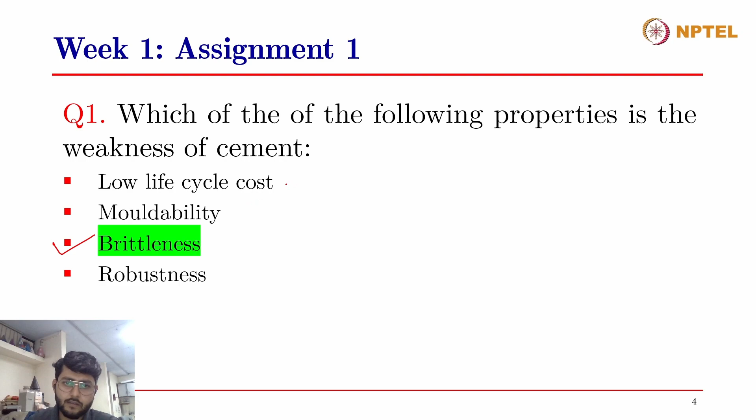All right, the correct answer to this question is brittleness. So brittleness is the weakness of cement. It is not the low life cycle cost. In fact, cement or concrete is a low cost material, as we know. It is moldable—cement or concrete in its fresh state can be molded into any shape or formwork when poured. So in fresh state, in a plastic state, cement or concrete can be molded. It has good moldability, and it has a low life cycle cost as well.

And then what is robustness? Robustness of any material is its ability to resist a great change or deviation in its desirable properties or performance parameters when the input parameters or surrounding conditions are changed a little. So a robust material won't undergo a large deviation in performance when input or exposure parameters are changed within a certain range. So concrete is a robust material.

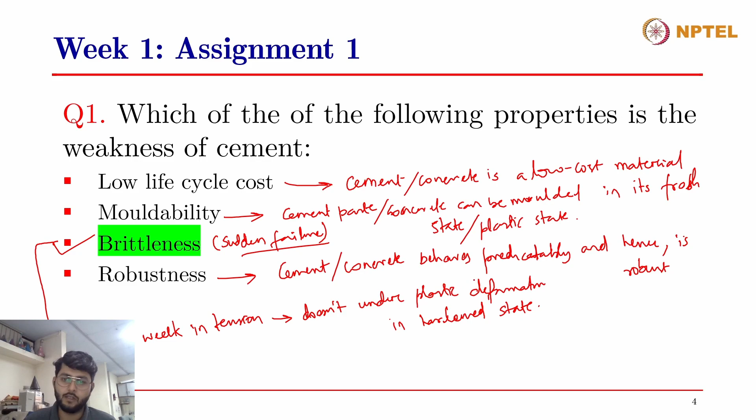But of course, cement or concrete can undergo plastic deformation in its fresh state. It can flow like a flowy material. But when we consider the hardened state, it doesn't undergo large deformation and breaks in a brittle manner.

Moving on to the second question: how much carbon dioxide is produced during the production of 1 ton of ordinary Portland cement? Options: 0.25 tons, 0.5 tons, 0.75 tons, or 1 ton. Which of these options is correct? Can somebody answer this question?

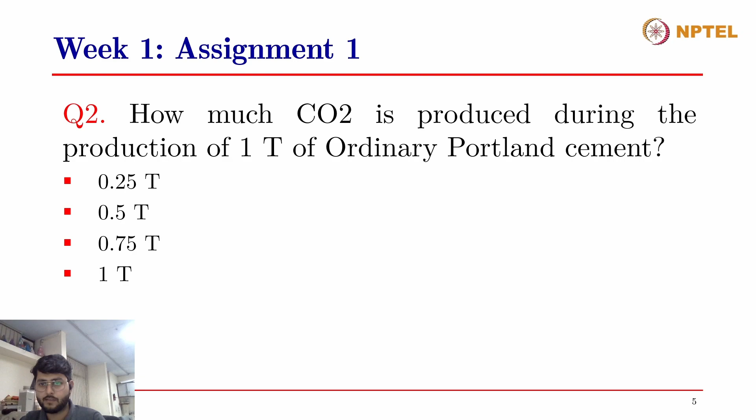The correct answer to this question is 1 ton. So 1 ton of carbon dioxide is produced during the production of 1 ton of ordinary Portland cement. It is a straightforward question. We have also discussed this in the previous sessions.

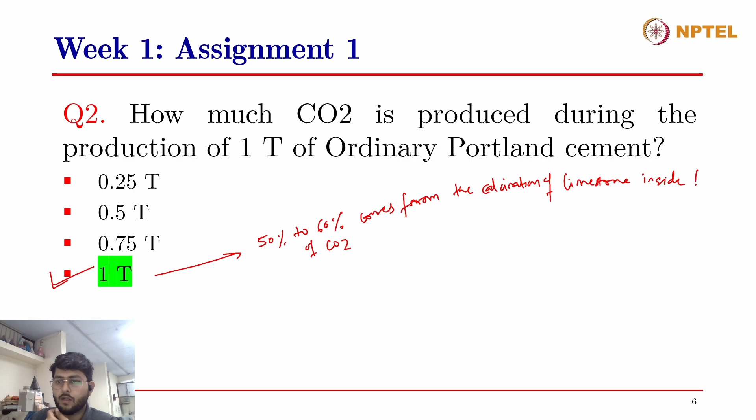Around 50 to 60% of this carbon dioxide comes from the clinkerization reaction or the calcination of limestone. When limestone gets converted to lime and carbon dioxide, that carbon dioxide released constitutes 50 to 60% of the total carbon dioxide emission associated with cement production. The rest is due to indirect emissions, which could be due to burning of fuel, transportation, grinding using ball mills, use of electricity in all the processes associated with production, and so on. That is the breakup of the total carbon dioxide emission associated with 1 ton of ordinary Portland cement.

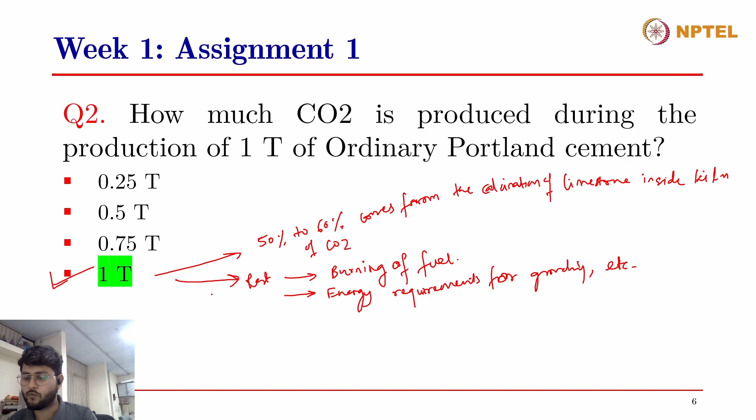Moving on to the third question: what is the formula of ettringite? Four options have been given: C3AH6, C6AS̄3H6, C6AS̄3H32, C4AS̄H12. Which of these four options is correct? What is the formula of ettringite? It's a very straightforward question. Can somebody answer this question?

The correct answer to this question is C6AS̄3H32. It is important to remember that ettringite is also called the AFt phase, and AFt is the abbreviation for aluminate, ferrite, tri. So the T in AFt means tri. In this case, it is trisulfoaluminate. So this tri can be associated with the sulfate that is available.

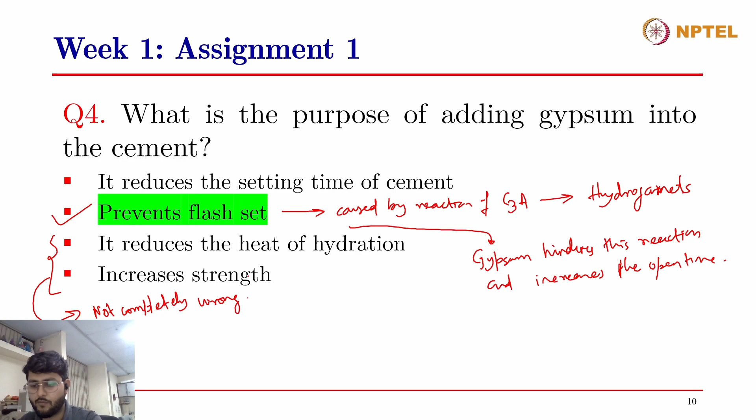Alright, moving on to the fifth question. Which of the following compounds has the minimum heat of hydration? The options are tricalcium silicate, dicalcium silicate, tricalcium aluminate, tetracalcium aluminoferrite. Tricalcium silicate is also known as C3S or alite. Dicalcium silicate is C2S or belite. Tricalcium aluminate is C3A or aluminate. And tetracalcium aluminoferrite is C4AF, or just ferrite.

Which of these compounds has the minimum heat of hydration? Can somebody answer this question? Yes, can somebody try? This is a very straightforward question. The dicalcium silicate. Dicalcium silicate or belite, thank you. Yes, that's the correct answer. Dicalcium silicate has the minimum heat of hydration among these four Bogue's compounds.

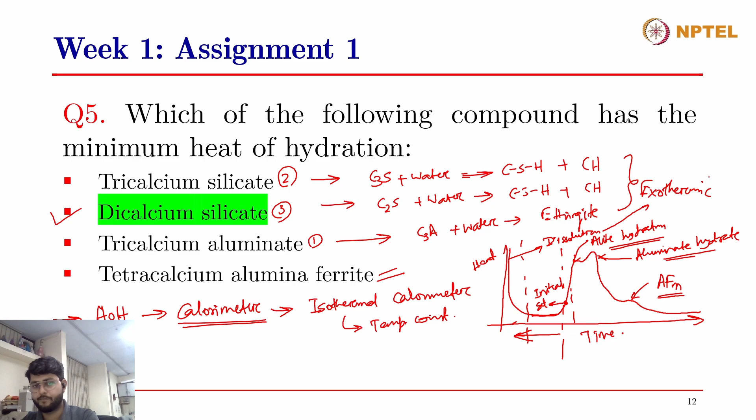Okay, moving on to the week 2 assignment 2 questions. The first question was, what is the cement to sand ratio for testing of mortar cubes for strength? Is it 1:1, 1:2, 1:3, or 1:4? 1:3 is the correct answer. Thank you. So the correct answer is 1:3.

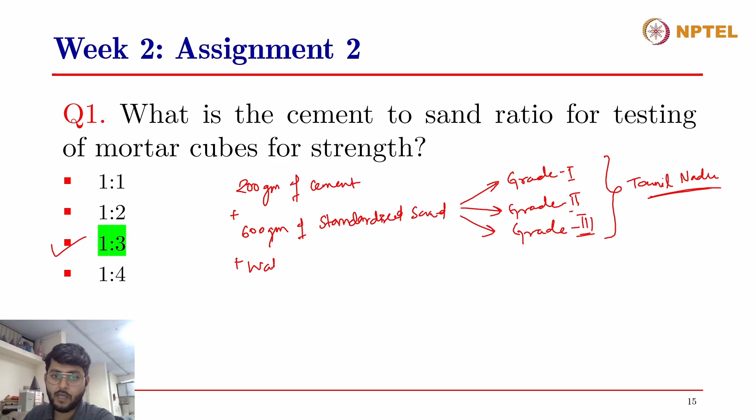It has been mentioned in the Indian standards that this standard sand has to belong to one of the regions of Tamil Nadu. I don't remember exactly, but it is somewhere around Ennore. It is called Ennore sand, I guess. I'm not sure exactly, but yeah. So this standard sand has to be procured from that region of Tamil Nadu, and it has to be taken in equal amounts from grade 1, grade 2 and grade 3, plus water, and this water can be calculated from the normal consistency test.

When we mix all of these constituents, we'll be able to produce only one mortar cube. So depending on the number of mortar cubes you want to produce, you can't just make a big mix and prepare the mortar cubes. No, you have to take these proportions and prepare each of the mortar cubes separately: 600 grams of sand, 200 grams of cement, and water from the normal consistency per cube. So these are different ways that the Indian standards have mentioned so as to have a consistency in the results of the strength test of cement.

So be it you're testing it in any part of India, apart from the little variations in the surrounding conditions or the environmental conditions, if you follow these methods, you'll be able to get consistent results for your cement strength.

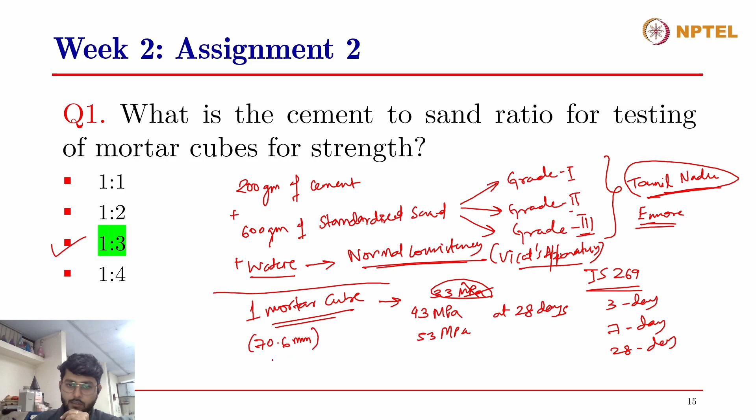So these are all the standard parameters that have been set up by the Indian standards in order to obtain consistent results of the cement strength. ठीक है?

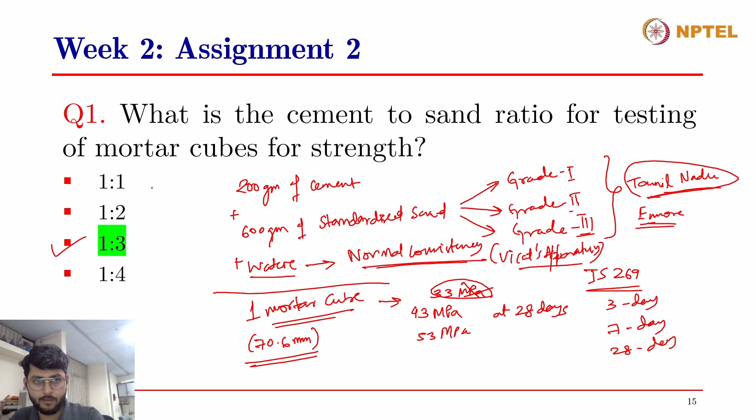Okay, all right, moving on to the second question of this assignment 2. The question was, which of the following is the characteristic of sulfate resisting cement? Low C3S or alite, low C2S or belite, low C3A content, low C4AF content. Which of these is the characteristic feature of sulfate resisting cement?

And why do we need that? Can somebody answer this question? Why do we want low quantity of one of these phases in the sulfate resisting cement? Yes? If you want to answer this question, then you can just raise your hands or unmute yourself and speak.

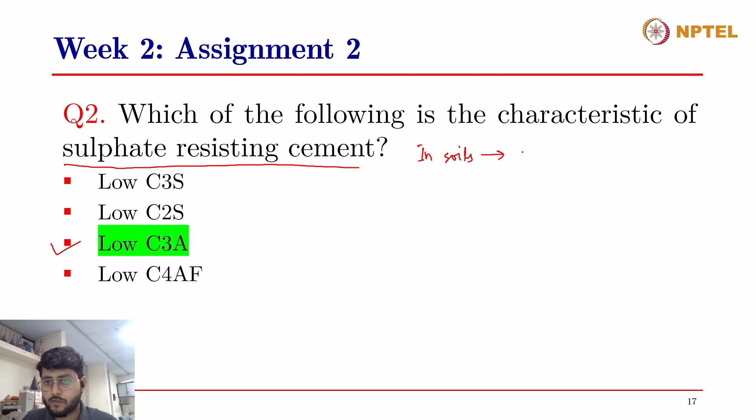Now, typically where is sulfate resisting cement used? When cement is used to construct any structural elements which are in contact with soils or any other source of sulfates. Soil is generally rich in sulfates, and when structural elements such as foundations, piers, or retaining walls are constructed over the soil, the sulfates from the soil get ingressed inside the concrete structures.

Now, it is fine when we also add sulfate to the cement in the form of gypsum to control the setting of cement, right? When sulfate is available at an early stage, when the concrete is plastic in nature, the C3A can react with the sulfate. The aluminates react with the sulfate and water to produce ettringite. Ettringite is good for us when the cement and concrete is in its early age, meaning in a fresh or flowy state.

Ettringite is a crystalline material. It occupies a larger volume than the aluminate itself, and therefore it occupies the voids that are present and provides us strength. When the concrete is in a plastic or fresh state, there is enough void volume to accommodate this ettringite formation, and therefore it will provide strength to us.

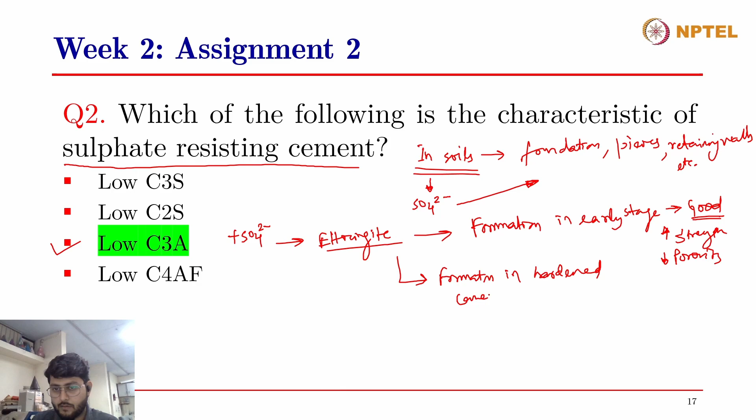This ettringite, as we know, is a crystalline material. It will occupy a higher volume, but now the concrete has hardened and is not plastic enough to accommodate the expansion due to ettringite formation. This expansive force creates a tensile stress inside the concrete matrix, and as we know, concrete is weak in tension, therefore this expansion will lead to cracking.

So ettringite formation at an early stage is good for us. It increases the strength, it reduces the porosity, but when it is formed in a hardened state, it leads to expansion in volume and further cracking in the concrete structure.

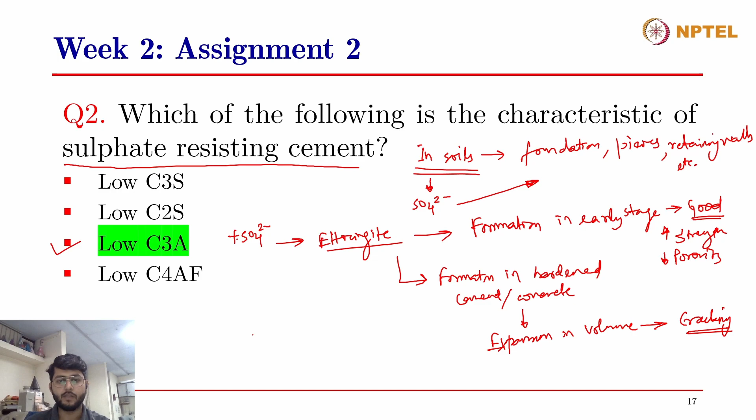So when we construct structural elements in areas with high sulfate concentration or prone to sulfate attack, we want the aluminate content in those cements to be low, so that whatever aluminates are present react at the early stage of hydration, and there won't be any aluminates left in the hardened state to react with sulfates, even if there is a sulfate attack later. All right. So this is the idea behind low aluminate content in sulfate resistant cement.

Moving on to the third question. Expansive cement has a high amount of silica, alumina, ferrite, or lime? Which of these phases? Can somebody answer this question?

Sir, alumina. Alumina, right? That's the correct answer actually. So expansive cement has a high amount of alumina hydrates. Thank you. As you might have also seen in the lecture.

I have taken this picture from the NPTEL lecture course, and you can see that expansive cement has a high alumina content. It is generally made by burning gypsum, bauxite and chalk. These minerals are burnt together to produce the expanding agent. Bauxite is the aluminum ore, and that contributes to the high alumina content in this expansive cement.

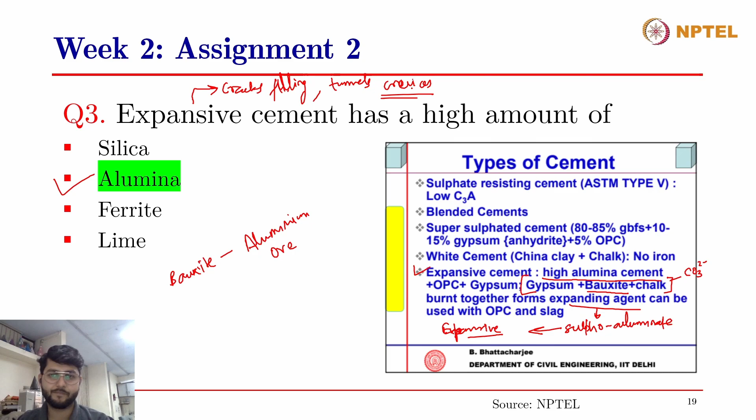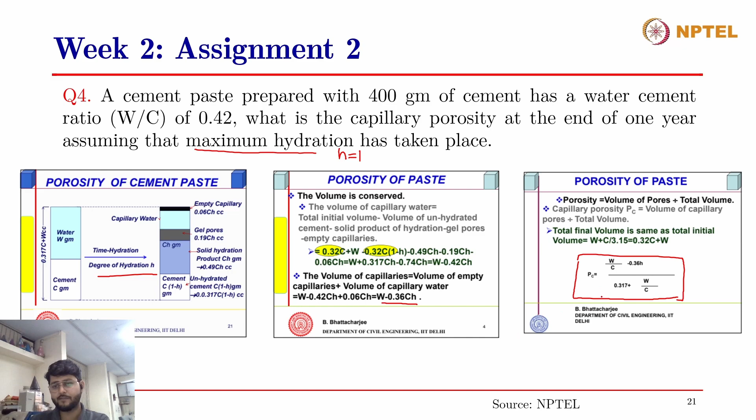So the final expression for the volume of capillaries is W minus 0.36 H. Porosity is defined as volume of pores divided by the total volume, and therefore the final expression for capillary porosity will be volume of capillary pores divided by total volume, and this is the expression.

PC equals W by C, meaning the water to cement ratio, minus 0.36 H, divided by 0.317 plus W by C.

Now we know that the maximum hydration has already taken place, so H tends to 1, right? So that will give us, for a water to cement ratio of 0.42, PC equals 0.42 minus 0.36 divided by 0.317 plus 0.42. Can somebody calculate this and tell me the answer?

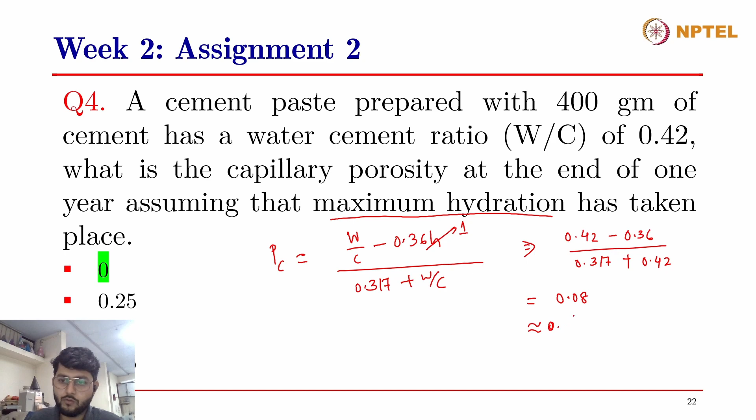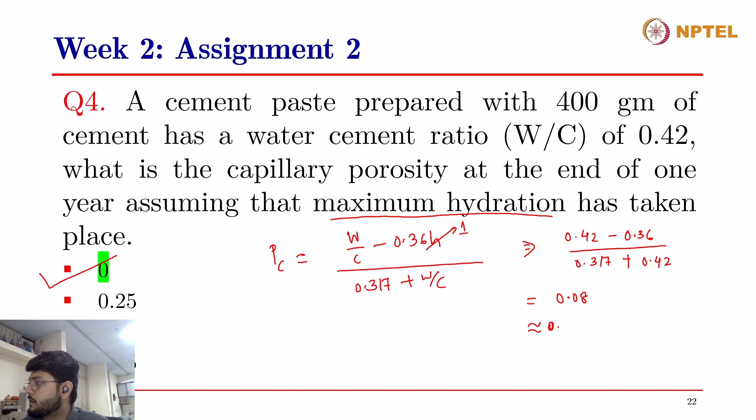PC equals 0.42 minus 0.36 divided by 0.317 plus 0.42, and the answer comes out to be 0.08. This is almost equal to 0 because this is the nearest value in the given options to this answer. So the correct answer to this question is 0. The capillary porosity of this given cementitious system is 0.

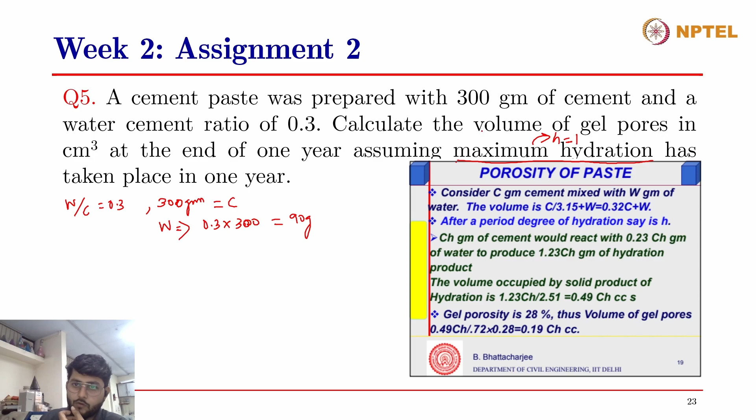This is pretty straightforward. We have already discussed a part of this in the previous question as well. So it is already mentioned that maximum hydration has taken place, so H equals 1, we know that. And then we have to calculate the volume of gel pores.

Now we know that for the calculation of the volume of gel pores, we need to calculate the volume of solid products, because as you can see in the view graph on the right, gel porosity is about 28% of the total volume of the solid hydration products.

In order to calculate the volume of solid products, 1 gram of cement reacts with 0.23 grams of water. We have already seen that. So 300 grams of cement will react with 0.23 times 300, which gives us 69 grams of water. So 300 grams of cement will react with 69 grams of water, and in turn, since mass is conserved, the weight of the solid hydration product will be 369 grams, right?

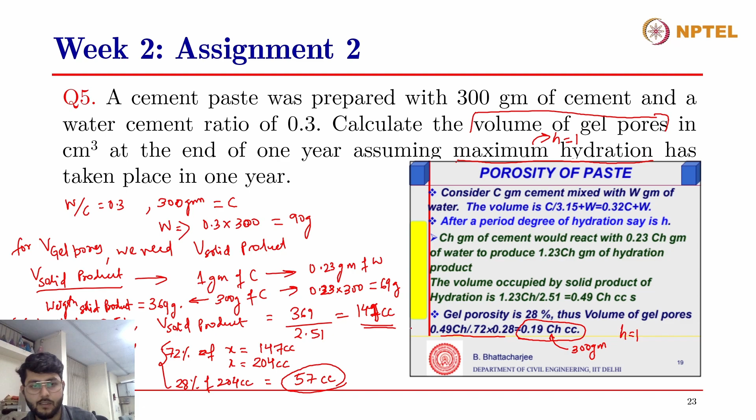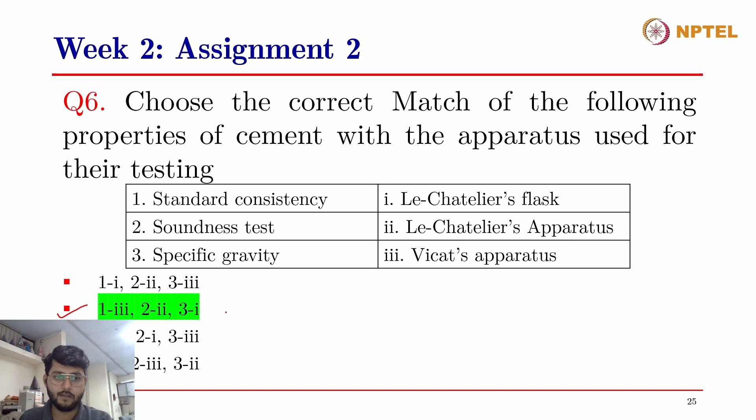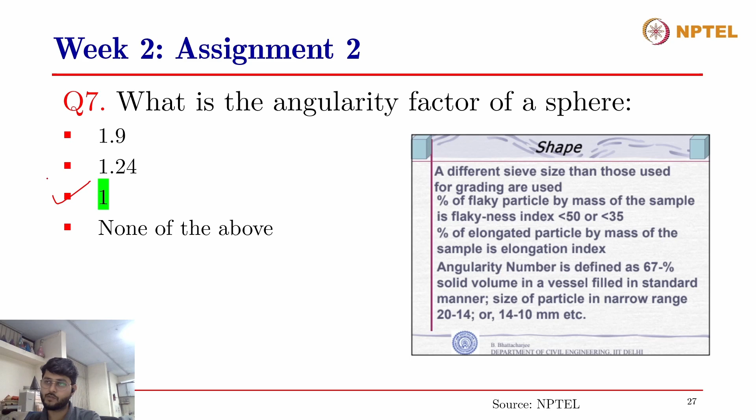So basically, if I explain it to you in a simple way, when rounded or spherical aggregates are packed inside a certain volume, the solid volume occupied by these spherical aggregates is 67%, and 33% of it is voids. We know that spherical particles have the best packing. Now, if we deviate from a spherical shape to an angular or irregular shape, the packing density also reduces, so the volume fraction occupied by the solids will be lesser than 67%.

So in order to calculate the angularity number, we subtract the solid volume occupied by the aggregate type from 67%, and calculate the volume of these aggregates by dividing its weight by the specific gravity, expressing it as a ratio with the volume of the water occupying the voids inside it. So angularity number can be expressed as the solid volume lesser than 67%, or in other terms it can be explained as the void volume in excess of 33%, because 33% is the void volume occupied by spherical aggregates. So this is how the angularity factor is expressed, and the angularity factor of a sphere therefore is 1, right?